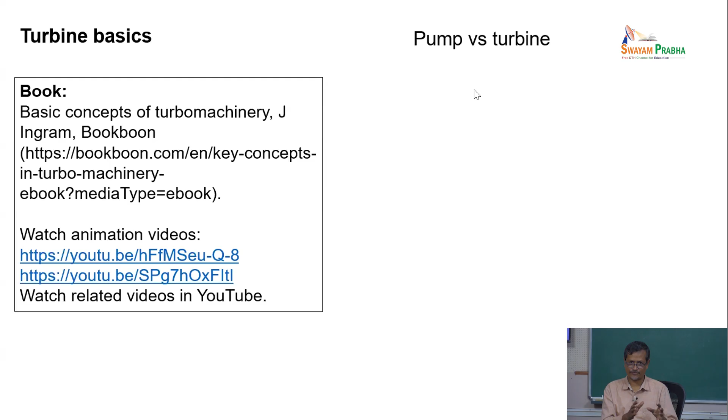So, pump versus turbine. As I already explained, a pump takes energy from electricity and gives energy to the fluid, so the fluid moves from one point to another, whereas a turbine is just the opposite. Your fan is actually in the pump category; it gives energy to the fluid. So, what is it? Transfer of energy between a rotor and a fluid, typically a gas or liquid.

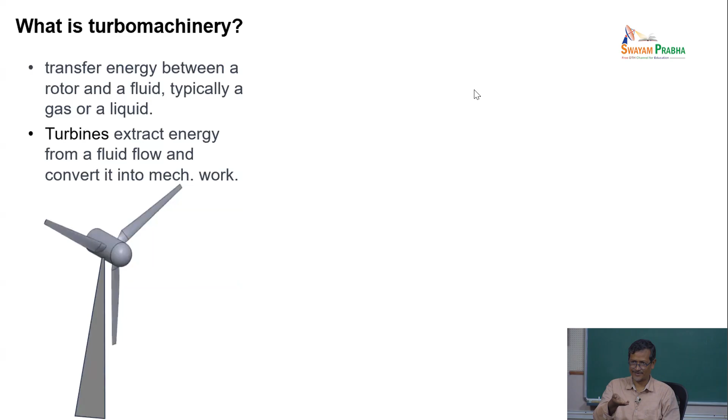A turbine extracts energy from a fluid flow and converts it into mechanical work, and finally we normally convert it into electricity. In many cases we do not convert it into electricity. For example, if you want to use it for water pumping and groundwater lifting, you can directly use this rotation for pumping groundwater, without converting into electricity.

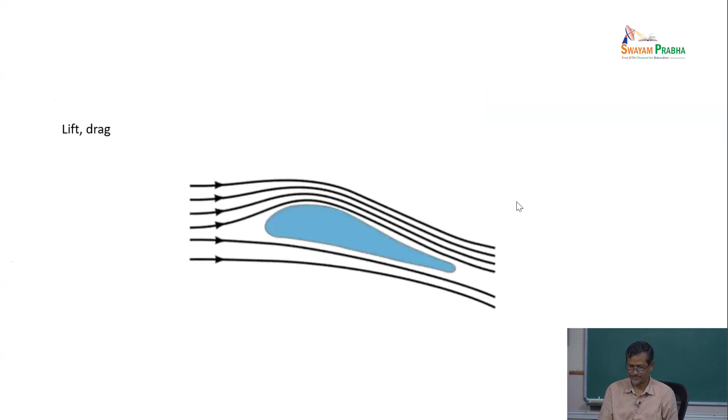A wave energy converter will have one hole, where you can put a turbine, and the wave will be coming and it will be inhaling and exhaling air, and there you are putting one turbine. There are two types of turbines: one is called the Wells turbine and the other the impulse turbine. The Wells turbine is a reaction turbine; the impulse turbine is an impulse turbine, as the name says.

The impulse turbine is like this. These blue parts are called guide vanes, and the red parts here are called blades. When air is flowing, the guide vane is like this, I am drawing, and my blade is like this. The fluid will pass through, and there will be another guide vane. Air guided through the guide vane hits the impulse turbine's crescent-shaped, half-moon blades.

When it is hitting, the air changes direction. When it changes direction, it gives some energy to the turbine blade, so the blade gets a force and tries to rotate. So, air is blowing, the guide vane gives the angle, then it hits the crescent-shaped blade, which gets energy. Then when the air exits the blade, it goes through a guide vane again and exits.

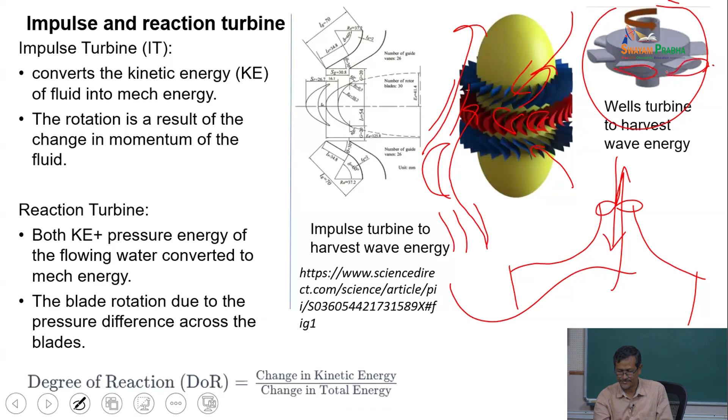Okay. So, if a symmetric airfoil is there, okay, here all the pictures are there. A symmetric airfoil like this means the upper curve and lower curve are symmetric, the same, just a mirror image about this axis. When air is going above this surface, your force direction will be like this.

When air is going from this direction also, the force direction will be the same. So, the blade will get the same directional force, although the air flow is changing, because this is a symmetric blade. Even the crescent also, you see this is a symmetric crescent, upper side and lower side the same actually.

If you see this one, this is my actual turbine blade we tested in our laboratory. I think if you go you can see my laboratory. This is also a symmetric blade. This is the actual turbine we designed, we tested and we handed over to NIOT, National Institute of Ocean Technology, and they tested it in the ocean. You can see this crescent shaped blade, symmetric, purely curved, right.

So, fluid will be going like this and it will be exiting like this, and here is the guide vane, and here the exit guide vane, and my fluid goes through this, hits this blade, again moves down, moves out. And all 30 blades are there. So, 30 blades will get some energy, and if you collect all the energy, it is a sufficient amount so that it will be rotating continuously.

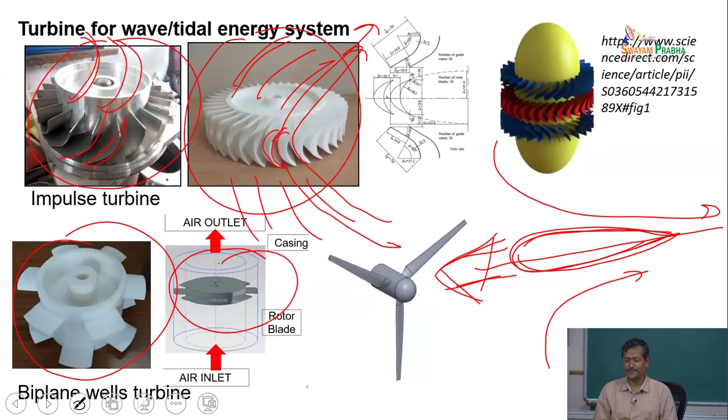You can see this one is single plane, one hub is there and 4-5 blades will be there, but he created 2 planes and added 4 more blades in another plane, so that he tried to increase efficiency and total operating range. The Wells turbine main problem, or this OWC main problem, is that the operating range is very small. Air is going up, air is going down.

Sometimes when air is moving up, high velocity, low velocity, low velocity, high velocity, it is happening like this. Air is not the same velocity, V equals 5 meters per second till here, again 5 meters per second; it will not happen like this. It goes 0, 1, 2, 3, 4, 5, again 0, again increasing to high velocity, again 0. So, air velocity will be changing continuously, right.

So, when low velocity is there, you are not getting power, because the turbine needs a certain velocity to get enough energy to rotate. If your air velocity is very low, it will not be able to rotate, so you need a certain amount of velocity. That means when air is moving up and down in OWC, when the wave starts moving up, you are not getting energy because air velocity is low. Again when it moved up and is trying to go down, again velocity is low.

If you see the sinusoidal profile, at the lower peak and upper peak you cannot harness energy because velocity will be almost 0. Only in the middle portion are you getting energy. So, with the sinusoidal profile, you are getting cut energy. So, we try to design a turbine so that we can get energy continuously. What will be the turbine's shape and size so that we can get energy from all velocities of air? Another thing happening in the Wells turbine, you may have heard this term, flow separation.

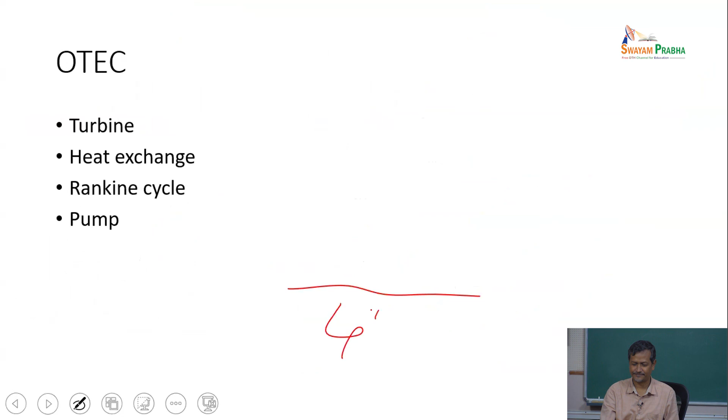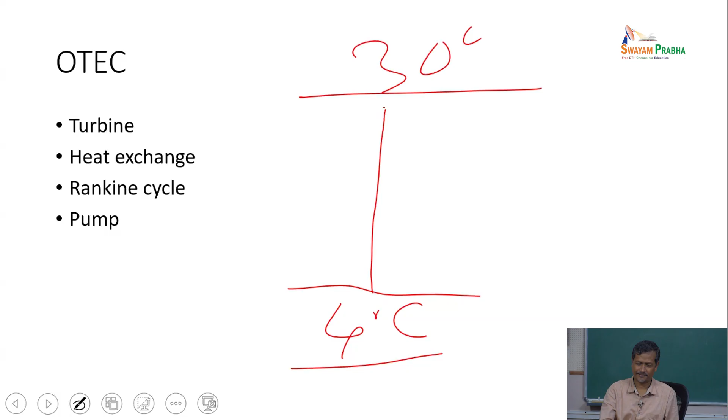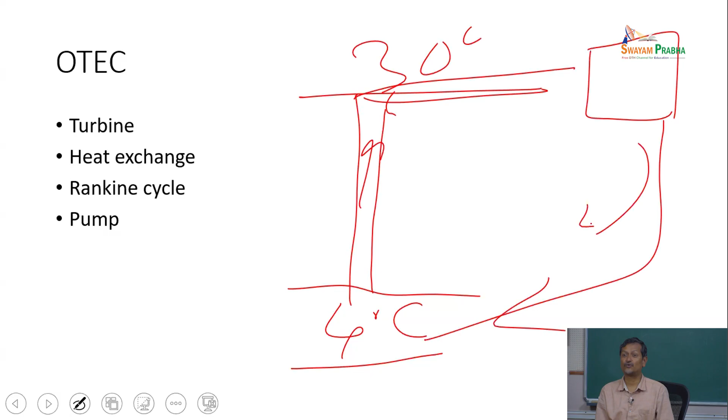OTEC, I already explained that OTEC will have low temperature 4 degrees, right, surface temperature 30 degrees maybe. So normally it may be like 27, 20 degrees; NIOT runs their system at about 20 degrees. So you take high temperature water, you make a piping system, you create steam, then you pass it through the turbine, then again put it in water. So this cycle will continue in the OTEC system. This is a closed cycle system. But if you are using an open cycle system, then the whole cycle will not be there.

They will be using water a certain way and they will be running the system. Okay, so it will have one heat exchanger. If you have a closed system, heat exchanger means, say your ammonia is having higher temperature, the temperature must be reduced and it should not be mixed with water, sea water. So it will be passing through a pipe or some exchanger system, and outside cold water will be releasing heat. Okay, so there will be a heat exchanger.

So if you are from mechanical, you know the heat exchanger, right. So in surface also there will be one heat exchanger. So two heat exchangers will be required to change your temperature, and one turbine system will be there. One pump also will be there, because from 4 degree to 30 degree you have to pump water. Okay, and efficiency is normally 2-3%, a very low efficiency system actually. 1 or 2% efficiency if you get, very good, your life is very good.

Why? In offshore area you are working and it's very much expensive, and many people are saying so much investment, where are you working? So some other argument is there: energy is free, you install, forget, you get continuous energy. Okay, that is why still people are working, and some people, for example Lakshadweep, they are our citizens, so they also have right to get electricity and the same living standard as people in Chennai are getting, right. So how can you give energy, power to them, water, energy, power, whatever you say.